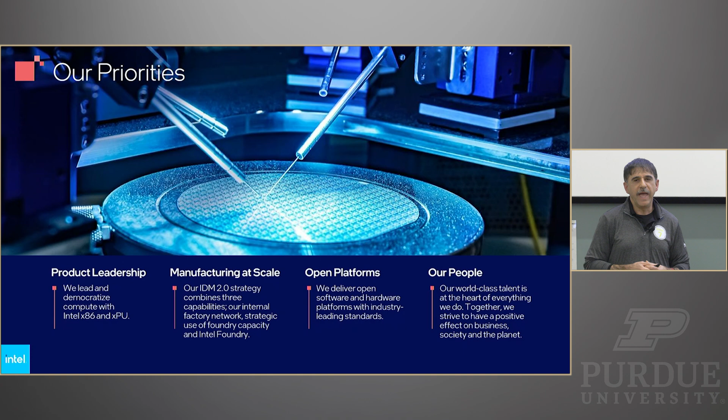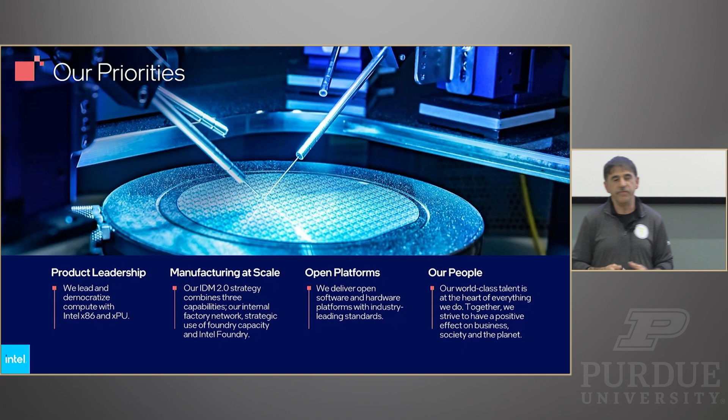At the end of it all, really the heart of what makes everything happen is the people. I'll use an example from my manager in Ohio, our vice president there — he says anybody with $20 or $30 billion can build a factory. So if you've got a bank account with $30 billion you don't know what to do with, you can build a semiconductor factory. But what makes it work is the people, the talent, the organization you build, and the culture that you have. That's how people fit into the overall picture for us at Intel.

So now I want to show you a video that's going to tie it all together, but please think about the video — you're going to hear certain things, and I'm going to go through them in the presentation.

Can you help me with the switch? It's Edge, and it's the first one. Yep, that one, just go ahead and click. Thank you. Oh, can you do that switch?

Making a computer chip requires the most complex...

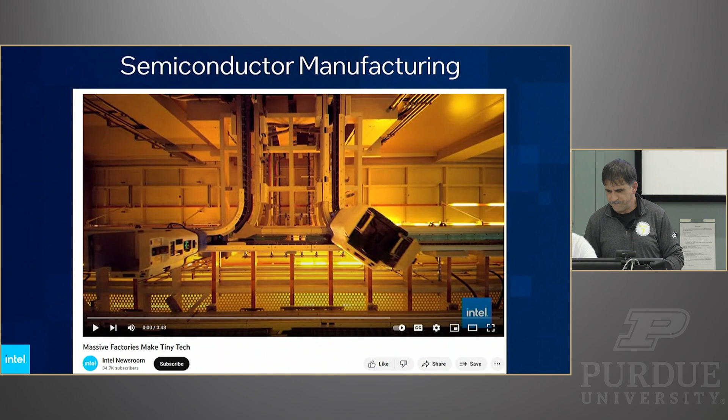Manufacturing process humans have ever devised. For more than 50 years, Intel engineers and scientists have continually faced, then overcome, challenges posed by physics when the features on a chip shrink to the size of atoms.

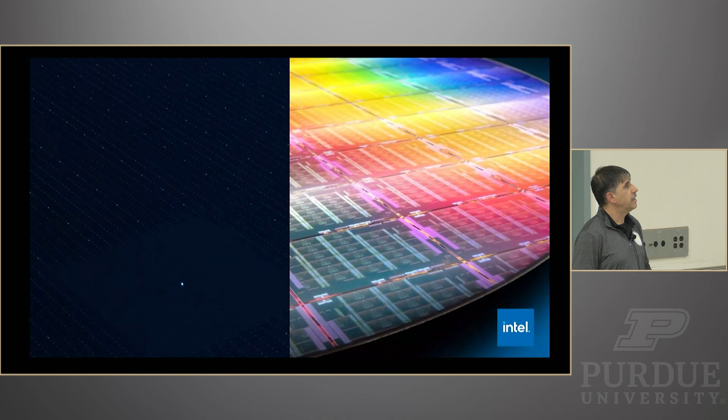They've developed new ways to squeeze billions of microscopic switches, called transistors, onto ever smaller computer chips, many as small as a fingernail. Transistors 10,000 times smaller than a human hair that cycle up to 5 billion times per second.

Back in 1965, Moore's Law, named for Intel's co-founder Gordon Moore, predicted that the number of transistors on a chip would roughly double every 2 years.

Intel R&D engineers, mostly based in Oregon and Arizona, have followed the Moore's Law metronome year after year, with inventions such as high-K metal gate technology, tri-gate 3D transistors, and strained silicon. These advances have paved the way forward for the entire industry. They are the foundation to enabling modern technologies infrastructure, including the internet, mobile computing, cloud computing, and artificial intelligence.

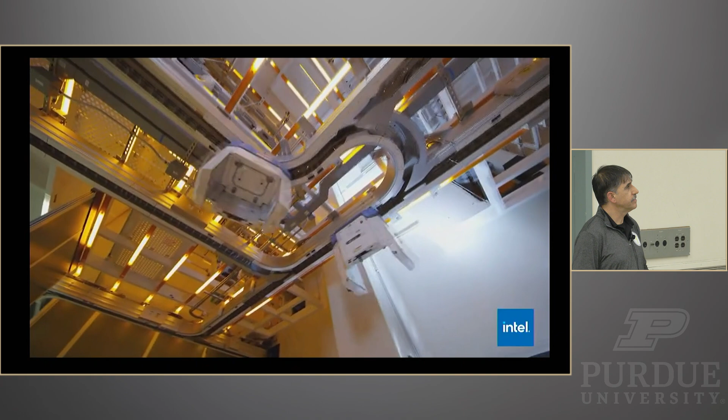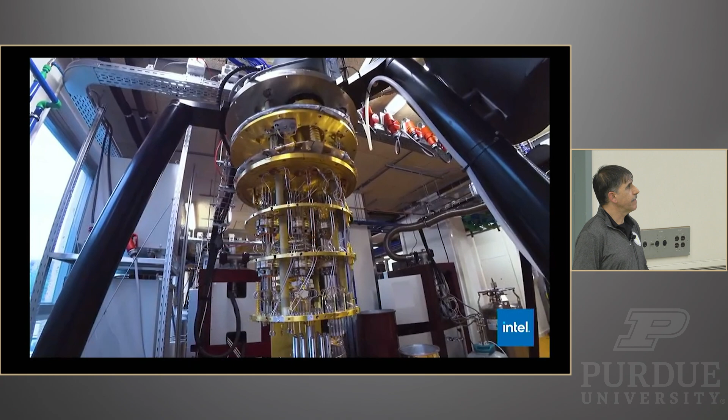And it's not just about silicon innovations. Intel's more recent advanced packaging inventions, such as EMIB and Foveros, allow us to interconnect together multiple chips on a single tiny package. Our focus on R&D, we invest billions of dollars every year, has been the foundation of our success and industry leadership.

Once chip architects create the highly complex blueprint for new computer chips, they're sent to one of these massive semiconductor factories, or fabs, for manufacturing. Building a new fab, fully equipped, costs about $10 billion and takes 6,000 construction workers about 3 years.

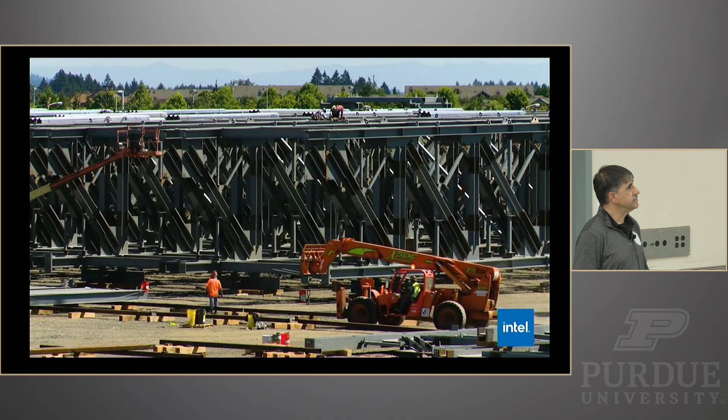A finished fab generates about 10,000 jobs, 1/3 of them in high tech. A typical Intel fab requires 35,000 tons of structural steel, more than 5 times the weight of the Eiffel Tower.

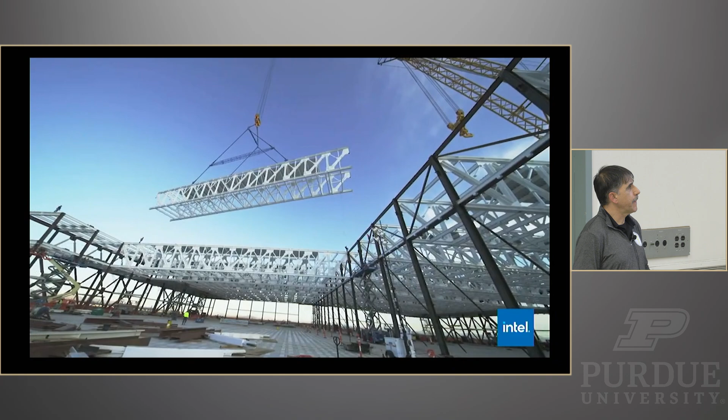The clean rooms in a typical sprawling factory cover the equivalent of 4 U.S. football fields. It often takes 2 semi-trucks to deliver each of the fab's 1,200 multi-million-dollar tools. Some of these tools weigh as much as 5 tons, the weight of 3 mid-sized cars.

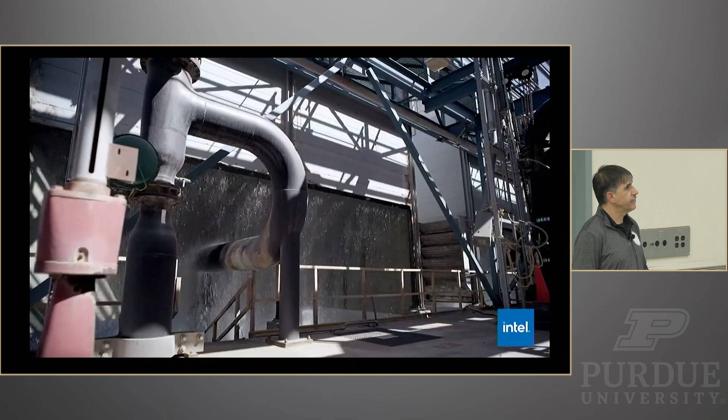Most Intel fabs include water reclamation facilities. 90% of Intel's water use is restored or returned to the environment. By 2030, Intel aims to reach net positive water, putting more water back into the environment than we use.

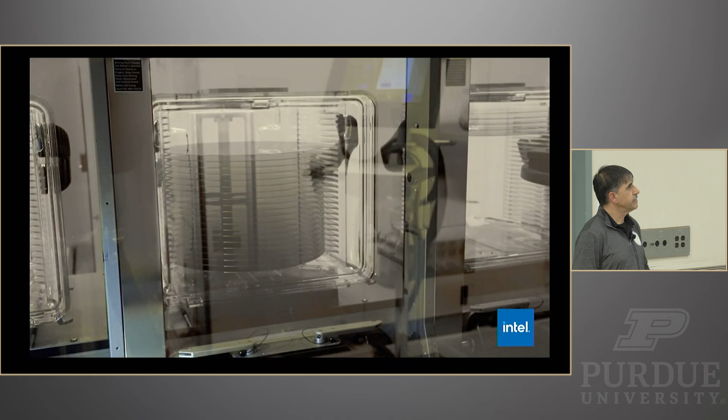Once a fab is up and running, this 27-mile automated material handling system shuttles blank silicon disks to hundreds of tools that eventually turn them into wafers, containing hundreds of Intel chips. Intel manufacturing and packaging is operating at mega scale worldwide, requiring a global supply chain that stretches across multiple continents.

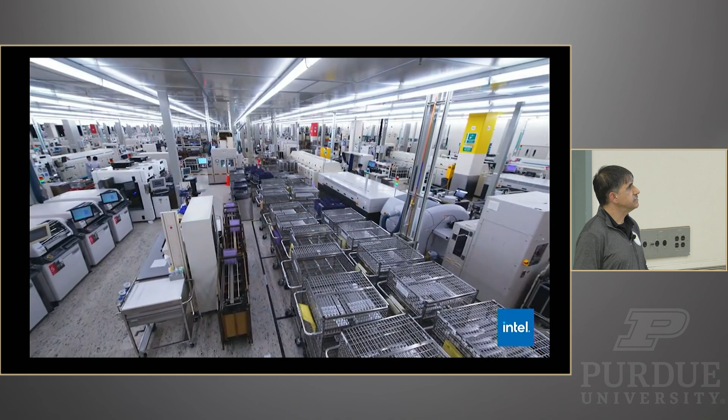Once they leave the fab, computer chips are shipped to Intel's assembly and test factories, where they are put into protected packages and tested. Our assembly and test factories send our packaged chips to one of our 17 distribution hubs across the globe. Intel teams there ship almost 2 billion units a year to over 2,000 customers.

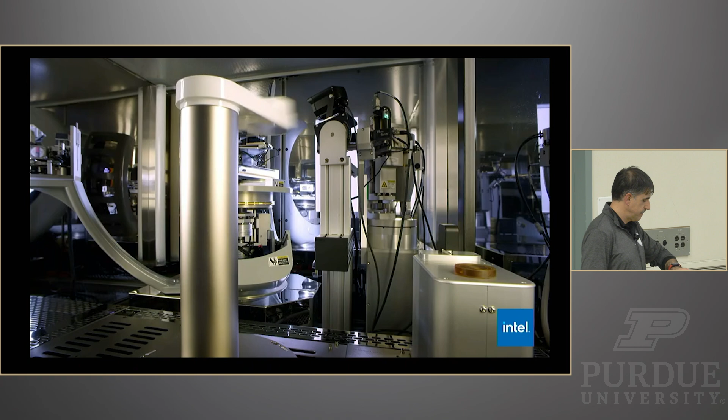Our vast supply chain includes 8,000 products and 16,000 suppliers in 100 countries. As the chip-making business grows ever more complex, Intel is one of the few remaining firms in the world, and the only one in the US that does it in-house. Design, manufacture, ship, and sell.

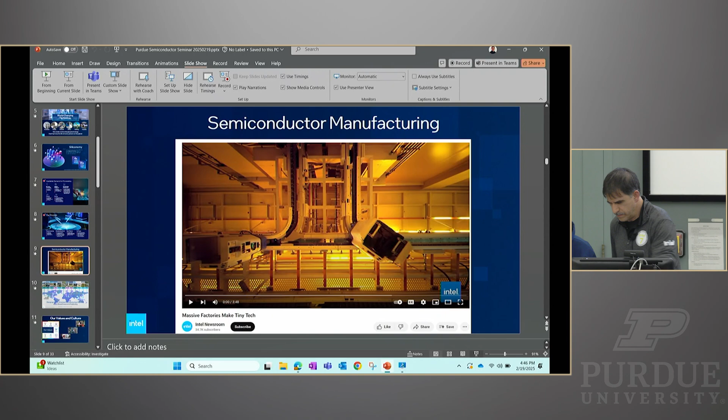Okay. Hopefully that was insightful to you. It really just, I love that video. It was made, I believe, in 2021 or 2020.

And also we have some future factories, and you heard about the Ohio factory that the professor mentioned earlier, and that's our next generation factory that we're building in the Silicon Heartland here in the Midwest.

Our values and culture, like I said earlier, anybody with $20 or $30 billion can build a factory, but without the talent, the people, the passion, and the culture and organization that you build, it doesn't work. The semiconductor business is a very complex and complicated business. It is hard work, it's innovation, it's uncertainty, it's exciting, but you need a very solid foundation and principles of values.

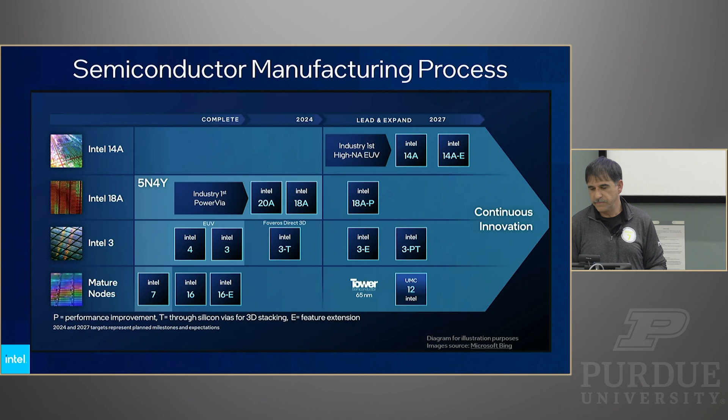Manufacturing process at the highest level - this is just an illustration to show what comes in. You start with a silicon wafer. For those of you who have seen the videos on YouTube, it starts with silicon, right? It starts with sand that they turn into the silicon wafer.

Have you seen that process where they pull the molten silicon and pull it - it's called an ingot? The tip of that cylinder at the top, that's the pulling process when they pull the silicon out of the molten bath of silica, and that's where you end up with these discs. Basically, they machine it and then slice it like a bologna slicer - but a very high precision bologna slicer that gives you the 300 millimeter silicon wafer. That's the substrate.

That's what's been carrying the industry for decades. I'll show you the transition the industry went through from wafer size to wafer size. Currently the industry is sitting at 300 millimeter diameter, which is 12 inches.

Then you have the process materials - we use a lot of process materials, gases and chemicals. Then also you have the process equipment, extremely complicated and complex process equipment that's put together by the ecosystem in the industry.

This equipment, the average cost sometimes is $5 million, $10 million, $15 million, or $20 million just for one piece of equipment. So the capital intensity that goes on in semiconductor manufacturing - that's why it costs $20, $30 billion to build these factories. And then you have the device design.

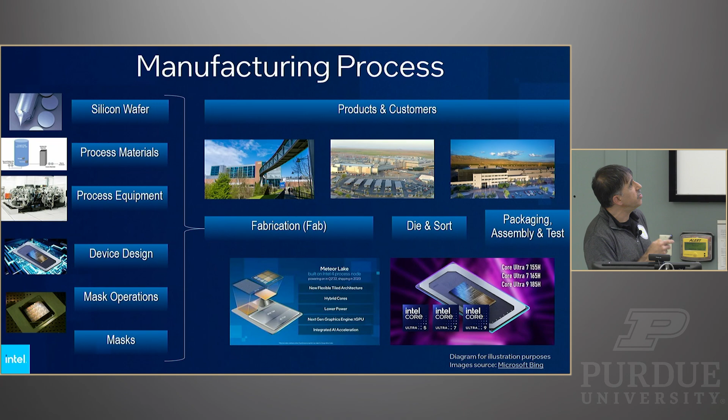So that's at the highest level. And the customers are with you along the way as you go through this cycle.

Now I want to bring it into, for you, a study or domain expertise that you're trying to explore. I found this diagram and really loved it because it puts everything into perspective, and it outlines the specific areas of the steps of the process I just described at the highest level.

Up at the top, this is the other piece that goes on in our factories: the automation stack. That's all the control systems, basically the brain of the factory. Now you've built the factory, put in all the facilitization, chemicals, gases, and ultra pure water, and you have the equipment on the floor, technicians, engineers. Now the factory needs a brain, because it has to know what material to run when, how fast, and how much. That's the scheduling and dispatching systems, the MES, manufacturing execution systems.

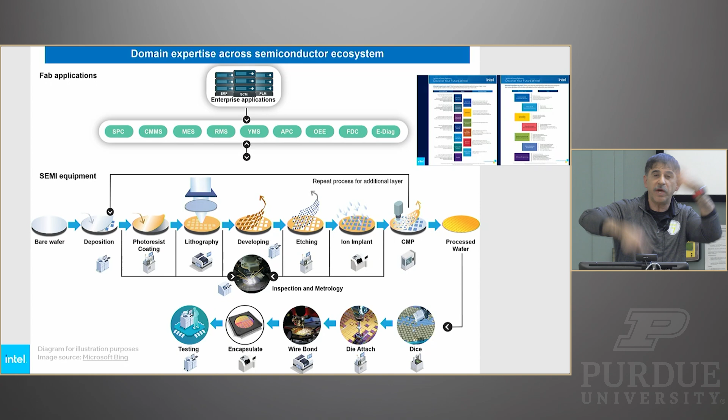That's the execute layer. But above this, there's another layer that does factory forecasting. There are a lot of algorithms built that look at the entire flow of the factory, what equipment is available or not, if equipment is going down for preventive maintenance. It factors all that in, and an engine runs in the background that basically says, here's how many wafers you can run through the line over the next 3, 4, 5 days. That gives us forecasting capability, and that engine constantly runs to evaluate and optimize the performance of the factory as conditions change.

For the most part, and you'll see this in one of the videos we have, the factories are running in autopilot, 24/7.

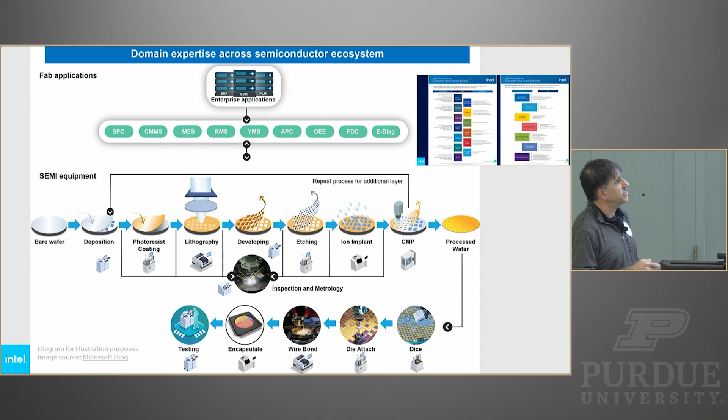Now, from a domain perspective, this is where the engineering comes in. Whether it's chemistry, chemical engineering, physics, optics, electrical engineering, mechanical engineering, or robotics, every one of these steps encompasses many of those careers. This slide, which Intel put together, tells you the domains and expertise you can explore as a career, whether in computer science, AI, machine learning, manufacturing, industrial engineering, operations research, etc.

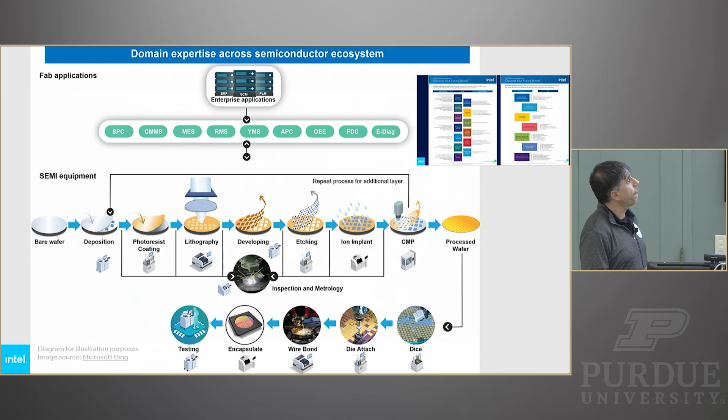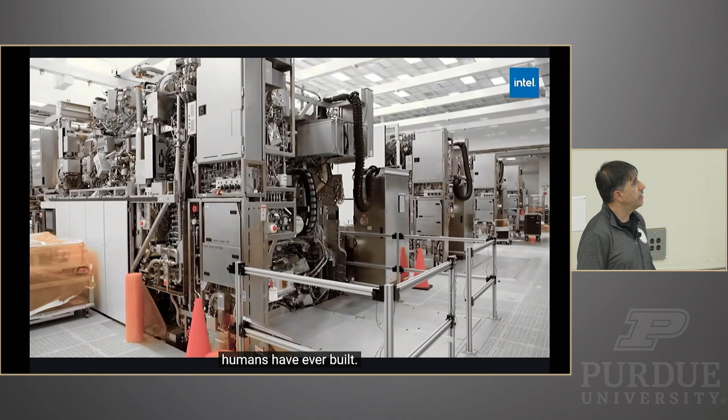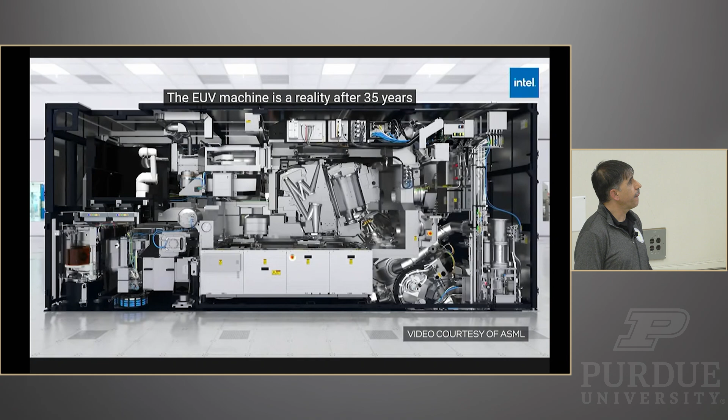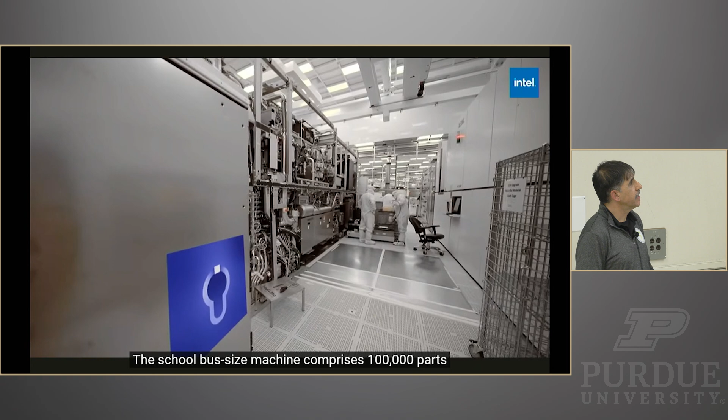This is it, an EUV, or extreme ultraviolet lithography system. It is likely the most complicated machine humans have ever built. It pushes Moore's law forward, and chip makers cannot produce leading-edge chips without it. But more on that in a moment. The EUV machine is a reality after 35 years of sustained research and development from lithography leader ASML, Intel, TSMC, Samsung, and others. Delivering just one of these tools to Fab D1X in Oregon took 3 747 cargo planes, 40 freight containers, and 20 trucks. The school bus-sized machine comprises 100,000 parts and weighs nearly 200 tons. So what exactly does this EUV machine do?

Intel co-founder Gordon Moore observed that the number of transistors crammed onto a processor doubles roughly every 2 years, a cadence that has continued for more than 50 years and has long been known as Moore's Law. The more transistors and components on chips, the cheaper and more powerful they become.

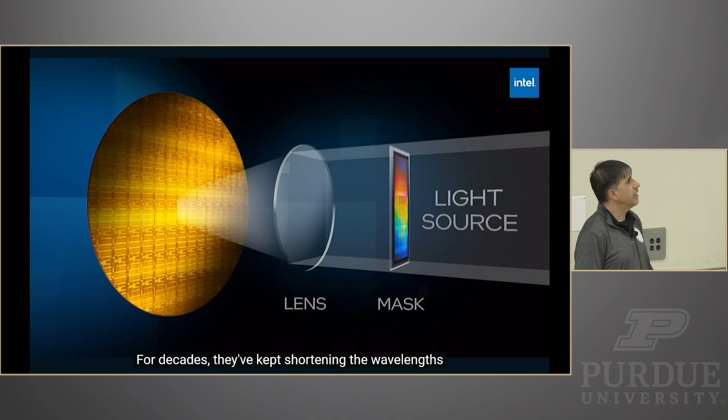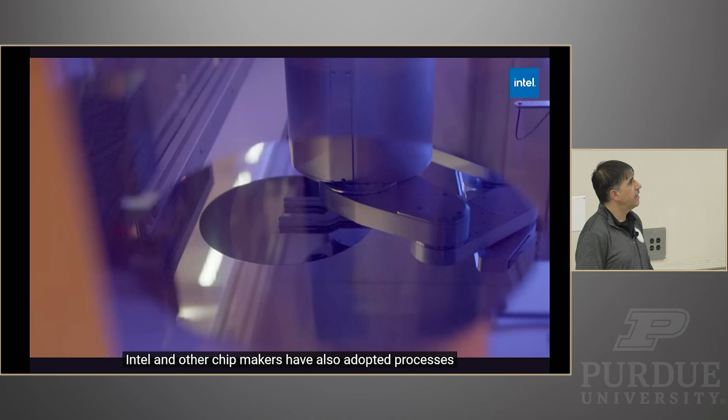Chip manufacturers use lithography machines to project circuit patterns onto silicon wafers. For decades, they have kept shortening the wavelengths of light on lithography machines to print features for ever smaller transistors. In pursuit of Moore's Law, Intel engineers have produced inventions such as high-K metal gate technology, tri-gate 3D transistors, and strained silicon. Intel and other chip makers have also adopted processes such as double and quad patterning and water immersion lithography to get the most out of today's 193 nanometer wavelength light.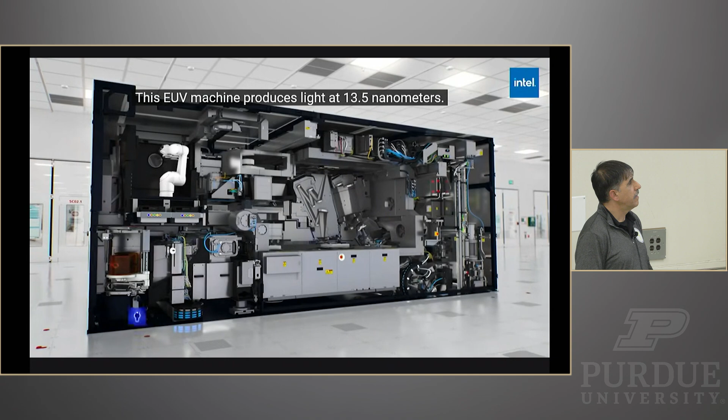But to make transistors even tinier, the industry needs lithography machines that use radically shorter wavelengths. This EUV machine produces light at 13.5 nanometers. Compared to today's machines, that wavelength is more than 10 times smaller. So how does this machine work? Put on your best thinking caps, and I will try to explain it simply.

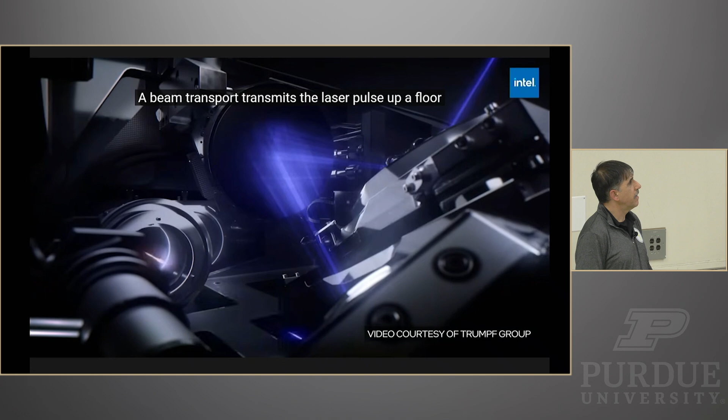First, extreme ultraviolet light does not exist naturally on Earth, so we have to generate it. Because this tool is so large, it needs 3 floors in the fab. Its laser, about 15 times more powerful than ones used to cut steel, sits on the level below the clean room. A beam transport transmits the laser pulse up a floor into the EUV machine, where a generator fires tiny droplets of metal tin, each droplet only about 1/3 the diameter of a human hair. And that powerful laser, flashing at 50,000 times a second, hits the molten tin.

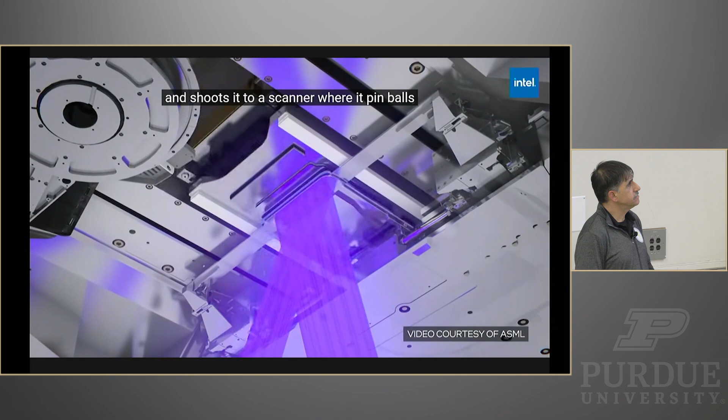The metal vaporizes into a plasma. This plasma releases light in the extreme ultraviolet range. A collector mirror gathers the 13.5 nanometer EUV light and shoots it to a scanner, where it pinballs off extremely precise mirrors that shape the light into slits that create patterns of transistors and interconnects onto a silicon wafer.

See, wasn't that simple? Just a couple more remarkable facts. Newer factories at Intel have ceilings 16 feet high. They are raised to 25 feet where these EUV tools rest, because it takes an overhead crane system to assemble the heavy system components.

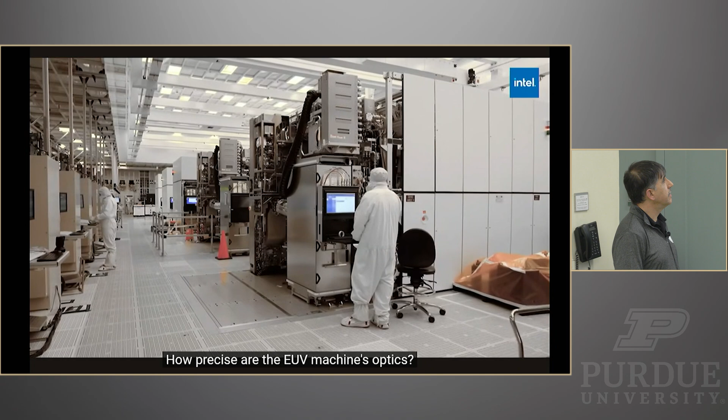How precise are the EUV machine's optics? Here's the math. It's analogous to an astronaut standing on the moon with a laser pointer targeting the tip of my fingertip here on Earth.

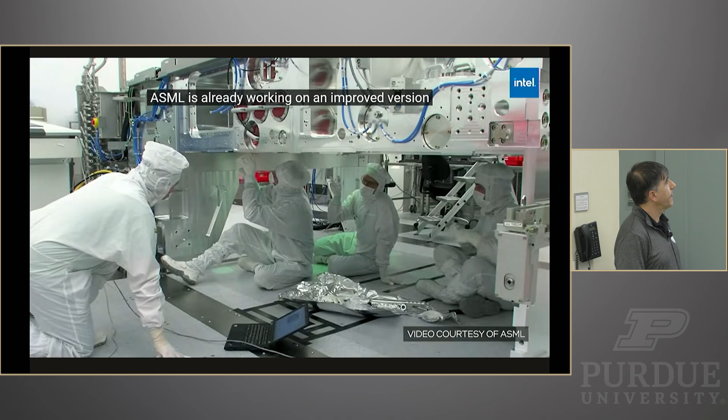ASML is already working on an improved version of the EUV tool that will offer even finer resolution lithography. Intel is currently the first customer in line to receive one of these next generation machines to prepare for the Angstrom era of computing. Isn't this mind-boggling?

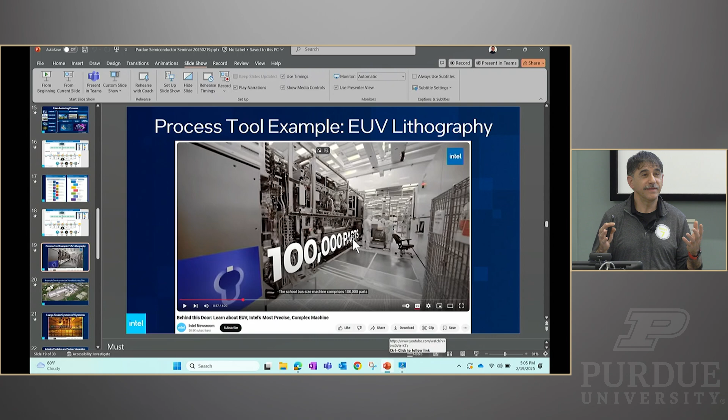I can't even, like, it's mind-blowing, really, what Robert just went through. And that's just one machine, but that is the most complex machine in the factory.

But if you go inside this factory, there's another video that I want to show you, but for the time, I'll go ahead and skip it. You can look it up. It's called The Heartbeat and Blood Flow of the Fab, that shows you how we move them. I think the other 2 videos showed you how the material moves in the factory.

We have all these vehicles running around. We do about 16,000 moves an hour, and a move is considered where you pick up the box from one location, drop it off at another location, and that's the automated material handling system that does that.

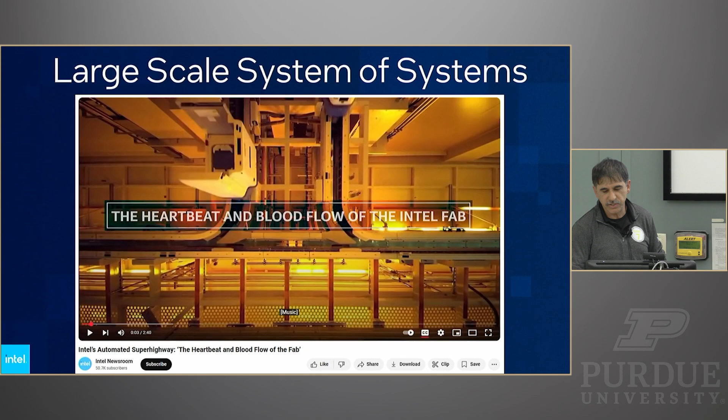But in order to do that, the industry got together around 1996 or so through 2000, and they created physical industry standards in order to enable that operation to happen in a uniform way across the entire ecosystem in the industry.

So this way, when we buy equipment, we can interface the automation systems to the equipment in the same way, a standard way, so we can do it 24/7.

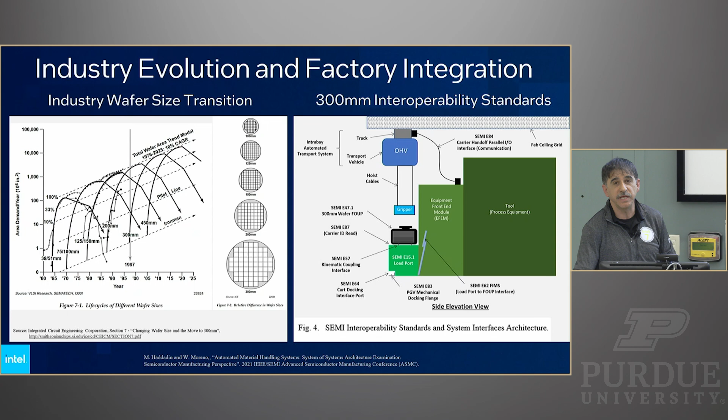A lot of the drivers behind this was productivity, but also safety. To do 16,000 moves an hour, how many people do we need in the factory to push carts? There were a lot of ergonomic issues, the physical size is about 10 kilograms, and for somebody to repetitively move 10 kilograms 24/7, that's where a lot of safety problems were resolved through innovation.

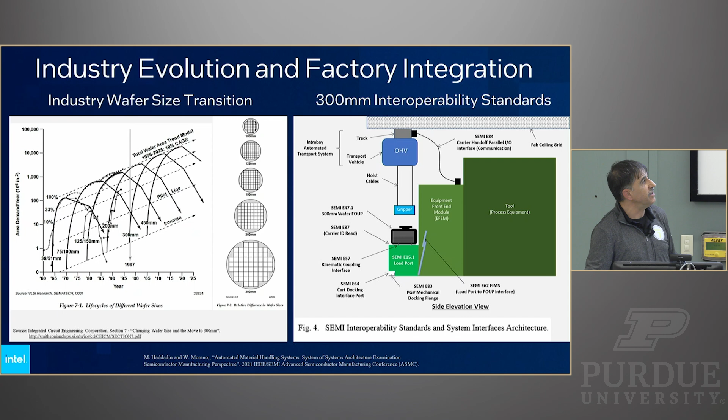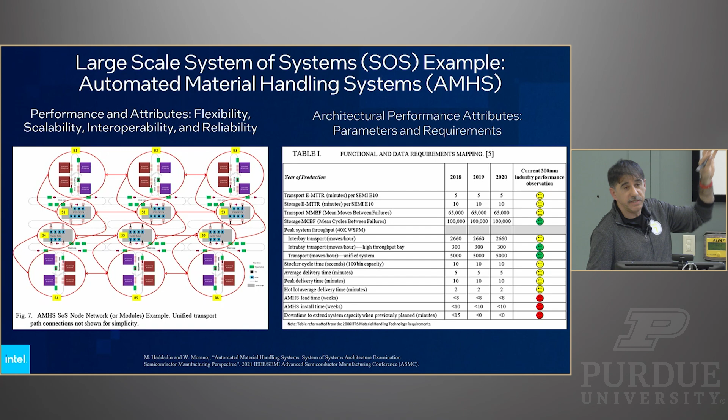These complex systems you see on the left-hand side are where some of you interested in industrial engineering, systems engineering, operations research, simulation and modeling, or factory layouts come in. We spend a lot of time trying to optimize how we set up our factories to maximize output, reduce cost, increase velocity, and we do a tremendous amount of work with industrial engineers to lay out the factory in a way that gives the optimal outcome.

So I'll leave you with this: to manage all of it, especially in the automation system I just shared with you, you're trying to maximize site utility. That's the fundamental objective of what the factory needs you to do. They want to maximize output, maximize velocity, how fast you get the product out the door. You want to minimize overall cost, but also minimize time to money, which is time to market, and that factors into how fast you can bring capacity online.

In order to do that, it's going to be done through 24/7 operations. You're going to create disruption in the capabilities you bring in so you can continue to push the envelope of technology. You have to have a systemic, disciplined approach, but there has to be ownership to make this happen 24/7. And that's what our engineers and technicians do every day.

And on the right-hand side, earlier I mentioned that we're a very largely complex, cross-matrix company. You can't do it all alone. You have to bring along the industrial engineers, the facilities, the factory design, and the construction teams in order to put these factories together and ensure you optimize the overall outcome.

So we'll probably open it up for questions, but these are my thoughts for you, whether it's the people, the leadership, or the aspirations you have in the career you want to pursue. Find your North Star, commit to it, and make sure you have fun. The semiconductor industry is exciting, but it could also be like a roller coaster. It's cyclical in many ways, but also full of innovation and complexity. That's why I've been there for 25 years, and I hope to continue for another decade or two, God's willing, and hopefully Intel will keep me around too.

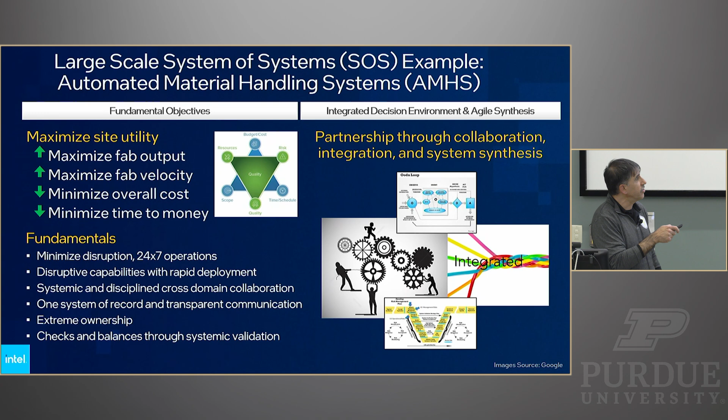Also, if you've heard of the OODA loop, it's about observing and understanding the environment you're in, because things are constantly changing. One thing constant in semiconductors is change, it's happening all the time. The decisions you made yesterday, a month, a quarter, or a year ago may not be the right decisions now, and you may have to pivot quickly. That's the observation and decision-making process you have to have. You also need discipline and a systemic way of solving problems and communicating across the integration of all the silos. Then everything gives you a nice, beautiful, integrated process and outcome.

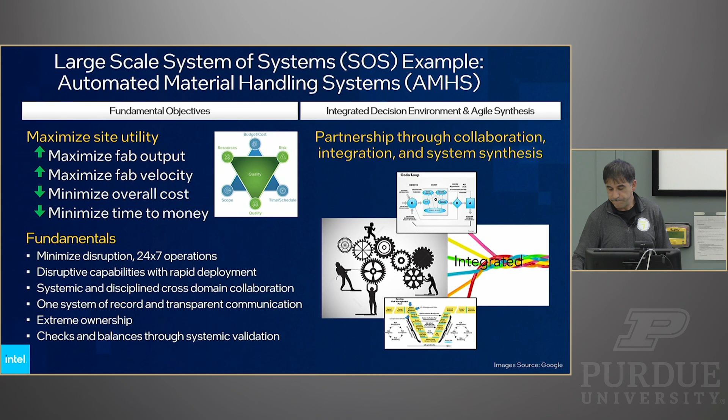So obviously, chip design and this kind of work is very innovative, year after year. For us, since most of us are graduating in 4 or 5 years, how would you suggest we keep up with recent tech trends and keep learning, given that we're not in the industry right now? That is a great, great question.

For that, as you are going through your journey, let me go here: curiosity, right? You've got to love that, that's one thing I encourage all of you to have, is to be curious. Ask a lot of questions and seek information. There's an Arabic saying that goes, seek knowledge even if it's in China. That was in the 7th century, because at that time China was considered, I think, the most advanced civilization, and the distance from the Middle East to China was so far that the saying means it doesn't matter how far it is, but seek knowledge. I think that's what it comes down to, curiosity. That's what I encourage you to do.

And by the way, the information is all available to you thanks to Intel and the semiconductor industry, because it's all there in the digital library. Also, engage and leverage other professional platforms, reach out to folks in the profession. It's okay to put yourself out there. If you're curious, ask a question. The worst thing that can happen is the person never responds to your text. Even on LinkedIn, for example, as a professional platform, put yourself out there and ask the question. It's a curiosity question. Take my name down, I'm happy to converse with you on any topic you like. I'm very opinionated, by the way.